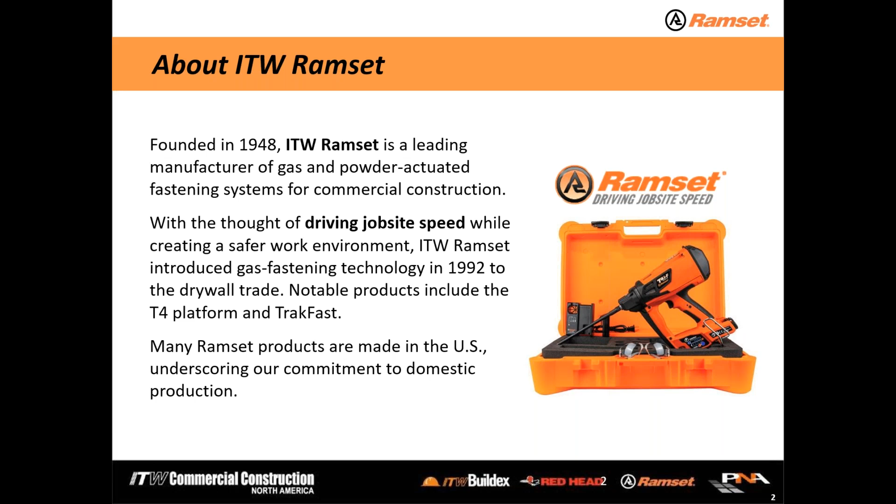Last paragraph there, a lot of our products here are made in the US, and we'll show you on the next slide here some of that. So we've got a little map. On the Ramset fasteners, most of everything is made in our Paris, Kentucky facility. Those familiar with the Kentucky area, Paris is close to the Lexington area. So majority of our fasteners are made there using USA steel, so we can qualify for some of the BABA type government jobs that might be out there.

Please see us if you have some of that. Our corporate office and where the ITW Commercial Construction Company is located is in the Glenview, Illinois area, just outside the Chicago area. We make some tools in Libertyville, and then in Roselle and Itasca there's some manufacturing facilities for some of the other brands that commercial construction has, Buildex and Redhead. So a lot of your blue screw Tapcons are made here in the US. Some of the Buildex Teks screws, again, are made here in the US. So we're a USA manufacturer, we try to do what we can to bring you products made here.

So if you have projects that need that, again, please come and see us there. Our parent company is Illinois Tool Works. That's a Fortune 200 company, and they provide us with a lot of financial backing to do a lot of different things. So go to the next slide, please.

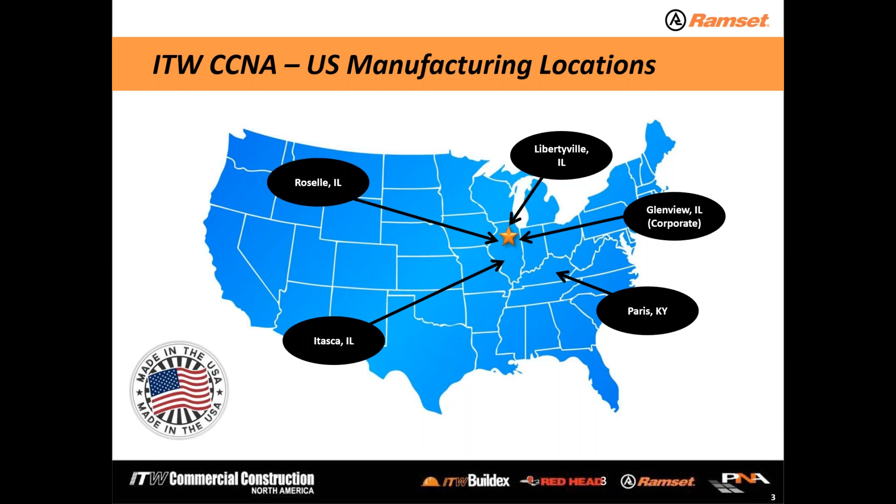So now we kind of get into it a little bit. How does this forced entry thing work? When we shoot fasteners into concrete, for example, these fasteners kind of create their own hole. You shoot the fastener in, you get a lot of pressure and heat created. That concrete is kind of pushed away and provides kind of a friction or compression hold. And then you do get some heat from that driving application localized around the point, and from that heat, you get kind of a sintering or a bonding. You can kind of see that in the photo there. So it provides a very, very good, strong hold.

And then these fasteners are a little bit more than a common 1008, 1020 type nail. These are high carbon steel, they're heat treated, and they have to be in order to penetrate and create their own hole, break up some aggregate that might be in the concrete, and give you that bond shown in the photo there.

Couple important things here: edge distance. When we talk about shooting fasteners into concrete, with concrete being fairly brittle, you need to stay away from the edge about 3 inches. You'll find there's kind of a rule of 3 going on here. With all that pressure of the fastener making its own hole and going in, if you are much closer than about 3 inches, the concrete kind of gives away and the edge might break away from the concrete, ruining some aesthetics that might be needed on the particular project. So it's important to stay at least 3 inches away from the edge.

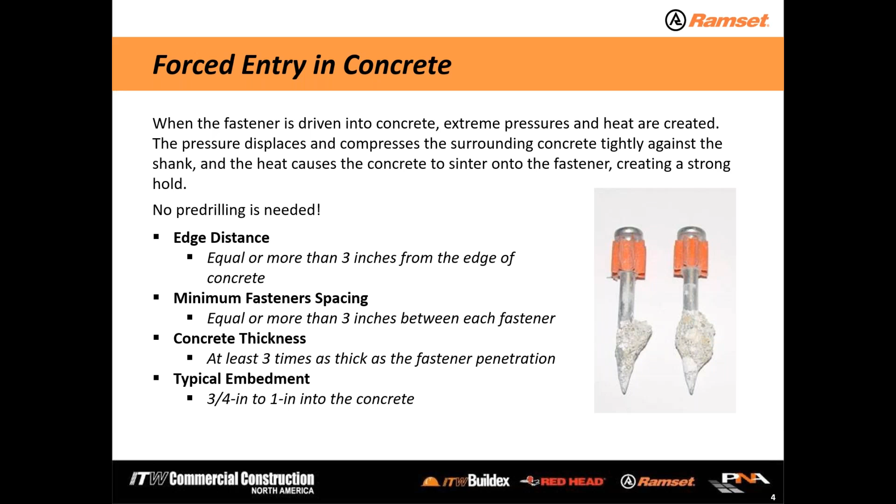Now, going into steel. Steel is a little bit different of a base material. Basically, when we drive a pin into steel, the steel around the shank is displaced. We're creating a hole, so we're not drilling—the nail itself is creating the hole. When the fastener goes in, the steel, being somewhat elastic, will move away from the shank, and then with it being elastic, that displaced steel wants to take back its own space, so it's going to flow back around the shank.

And if you've got any knurling on the fastener itself, that is a very good thing with steel fastening—it provides increased surface area. So all that steel is going to flow in and out of that knurled area and give you increased bond. There is some heat—I wouldn't go so far as to say it welds itself in, but that heat does help that fastener out quite a bit going in.

So edge distance and spacing is a little different than concrete here. This is something we want to take a look at. You want to stay about 1/2 inch away from the edge, and the edge is any physical edge to the center line of the pin. The 1/2 inch edge, really, if you think about a powder actuated tool or a gas tool, that's about the diameter of the fastener guide or the muzzle that the pin exits from. So we want to be sure that edge of the tool is completely on the work surface so as not to cause the pin to exit free flight or something like that.

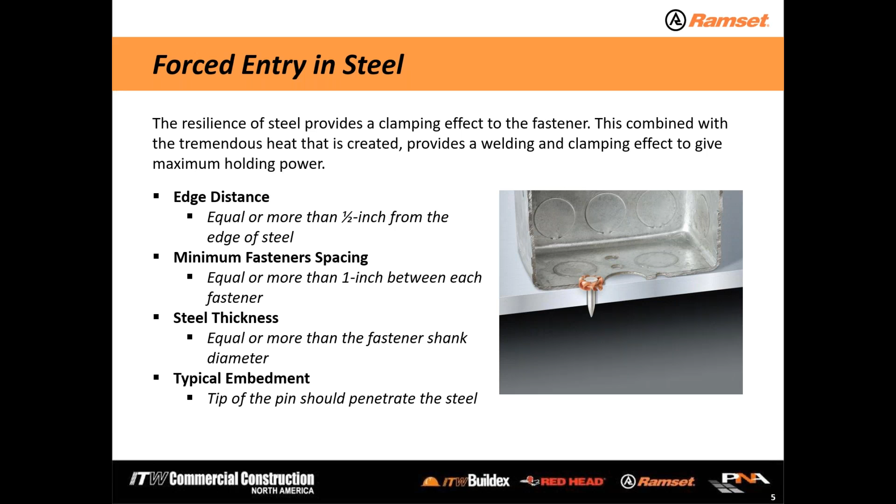So why do we use forced entry? The number one reason would be speed. Basically, as fast as I can pull the trigger, I get a fastener to come out of the tool. I don't need to drill, I don't need to find the right drill bit for the anchor I'm using, I don't need to manage the dust, I don't need to find cords and hoses to go along. A lot of that relates to that cost-effective square you see on the screen there, because I don't have to worry about cords, hoses, dust, and drill bits. Again, as fast as I pull the trigger, I can get a fastener to come out.

I can handle light to medium duty applications — interior partition walls, maybe exterior curtain walls, not necessarily structural stuff, but curtain wall type applications, MEP, conduit straps. There are a lot of different applications we'll talk through later in the presentation. And then these tools are completely portable. They're probably the first portable, cordless type tools in the marketplace. Again, I don't need cords and hoses to drag along to drill holes or mitigate dust with vacuums and such. So it's a completely portable system.

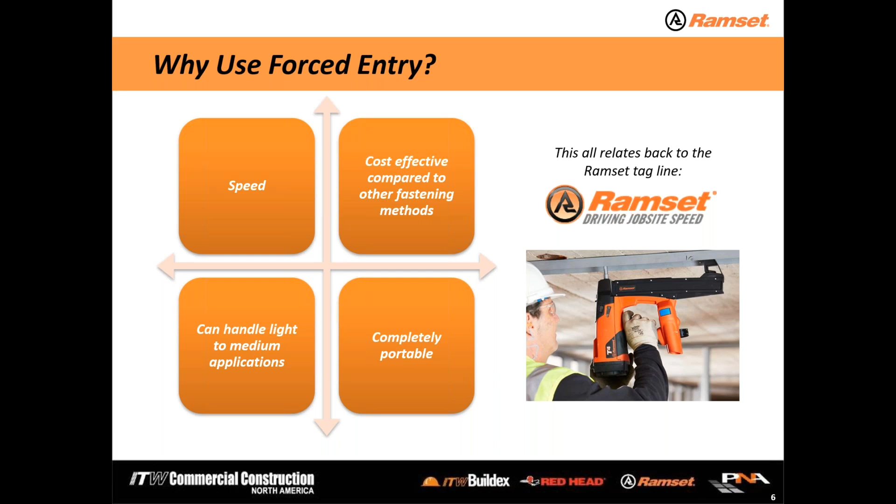Why we use gas versus powder. These are the two basic systems that the Ramset brand offers. With gas, you need speed — as fast as I can push down, pull the trigger, and let off, I get a pin to come out. Most of our gas tools have at least a 40 pin capacity, so I can do that 40 times. With a powder magazine, I can do that up to 10 times. The big advantage for gas is in bullet point number three: low recoil. It's very, very easy to use, easy on the operator, not a lot of fatigue when using a gas tool.

However, the downside is I'm limited on power. Gas tools, battery tools, and similar tools in the marketplace today are all about a number 2 brown load as far as power goes, in comparison to a powder actuated tool. If you know a little bit about powder, number 2 is low on the spectrum. I've got a number 3 green load with more power, a number 4 yellow, a number 5 red, and a number 6 purple I can go to. So that's the advantage of powder — I have the power for very deep embedments, the power for larger shank diameter fasteners, and the power to shoot into heavy, thick steel. There are a lot of different reasons to need that on a particular job site.

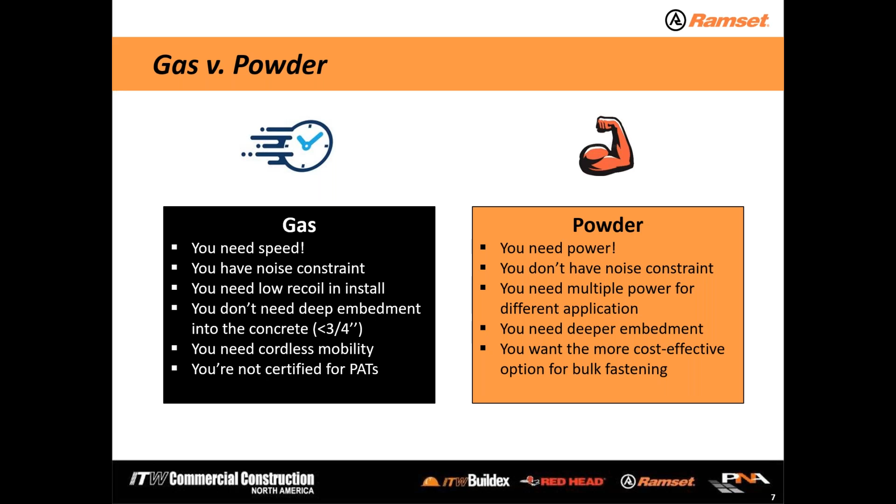We can try our step shank pins. The step shank pin is a unique pin or nail geometry where the tip of the pin has a smaller shank diameter than the back side of the pin nearest the head. The theory is that smaller shank diameter almost gives you a pilot hole for that larger diameter to follow, and that does tend to increase stick rate and help us get into difficult base materials.

Masonry, or basically CMU block, is going to be your next most common type of base material. Masonry you see a lot around stairwells and maybe elevator shafts. Could be the entire building is built with that.

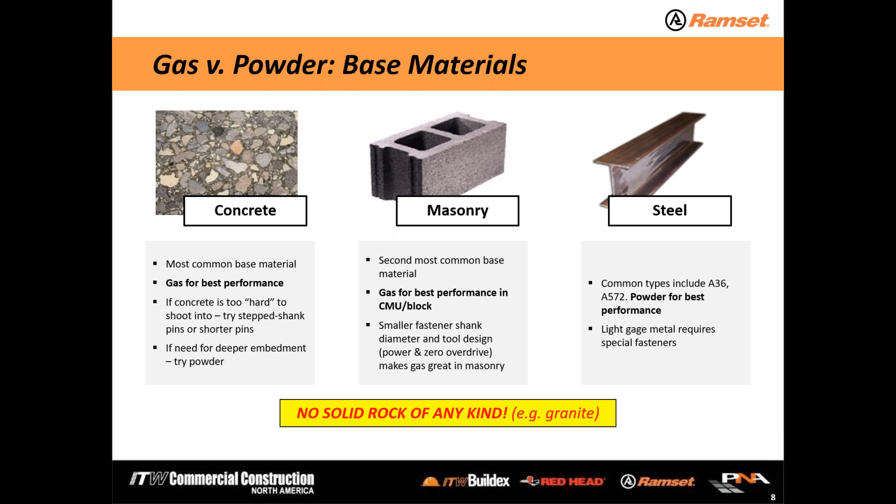Here what we've got is one of the more common applications that a lot of you may recognize: interior track down to concrete and or steel. For this application, we use and like to promote our T4 mag tool. Again, it's a gas tool. We sell fasteners in packs of 1,000. You get 2 fuel cells, you get 1,000 fasteners, and that's usually enough to drive everything. The tool also does have a lithium ion type battery.

This tool is unique in that it has a battery and fuel gauge in the back of the tool. There's a little round button at the back that you can push to see the level of the battery and or gas that might be in the tool. So you'll never run out - you pay attention to that, and it's a good, neat feature to have.

T4 mag is a pretty powerful tool, one of the more powerful tools of its kind in the marketplace. A couple different advantages: it's got a nice tapered front housing, gives you a good line of sight for the operator when they're working overhead. That's important where you want to know the placement of where the fastener might be. Low pushdown force - it's a very easy tool to compress. We only compress the front end about 3/4 of an inch, pull the trigger, low recoil. It just is a nice tool for the operator to use on a daily basis.

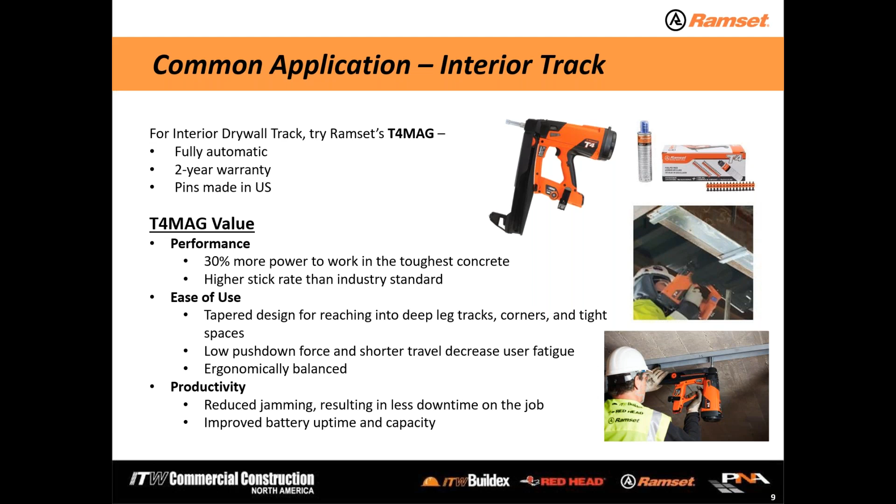The RA27 is a very comfortable tool to use. The automatic spring return and the push down force make it a very smooth type tool. I think it operates a little nicer than a lot of tools in the marketplace. It does have an optional magazine on the front that lets you shoot 10 fasteners, corresponding with the strip load of 10.

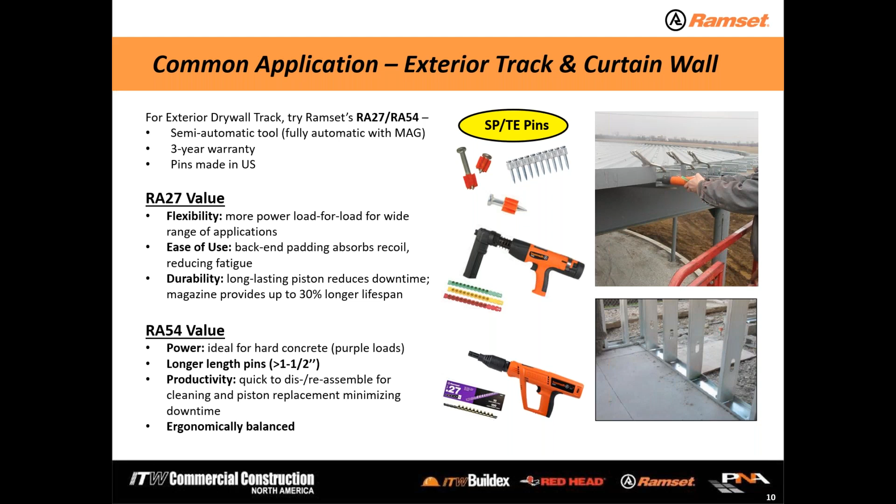Next application, please. Next slide, please.

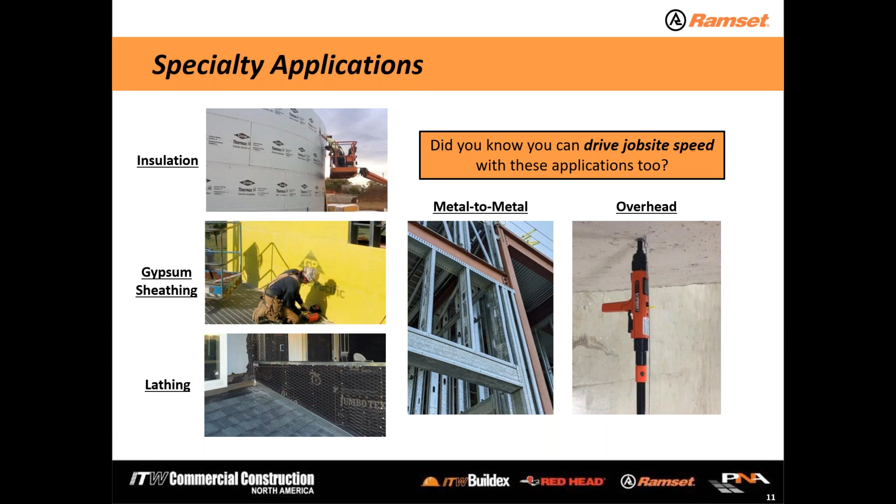Here we've got specialty applications. These are some of the things that maybe you weren't aware you could shoot. Some of the more uncommon things: insulation, gypsum sheathing, lathing for stucco or something like that, metal to metal, and overhead. Next slide.

Going into it, we've got the GypFast tool. This tool is designed to shoot either gypsum sheathing or plywood up to light gauge metal studs. It's a gas tool with a coil magazine that has a coil of 150 nails. And the nails have a unique barb to them.

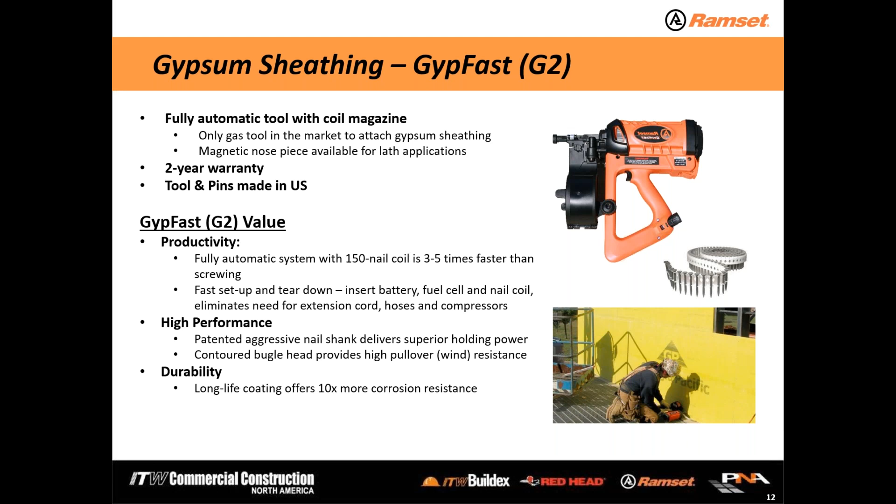So if we go to the next slide, we'll talk a little bit more about that. Best practices for the G2 tool.

You can see there in the top, the coil kind of floats in the magazine. The nail itself has a very aggressive barbed knurl to it. What tends to happen is as you shoot the light gauge material, the metal petals on the backside, and then that barb kind of interlocks with that petaled metal, which gives you that pull-out resistance in those light gauge applications.

The sweet spot here really is going to be 18 gauge, 16 gauge, and 14 gauge. It can work in 20 gauge and it can work in 12 gauge. There may be some slight issues you may have to overcome in either the light material or the heavy material, but primarily we'd like to keep it to 18, 16, and 14 gauge if possible.

With the gypsum sheathing, it's important that we don't break the sheathing paper. So in order to do that, we've got a depth drive adjustment. You can see that in the lower right-hand side photo, there's a little thumb wheel adjuster. So when you first walk on the job site, it does take an operator with a little bit of attention to detail to set up the tool.

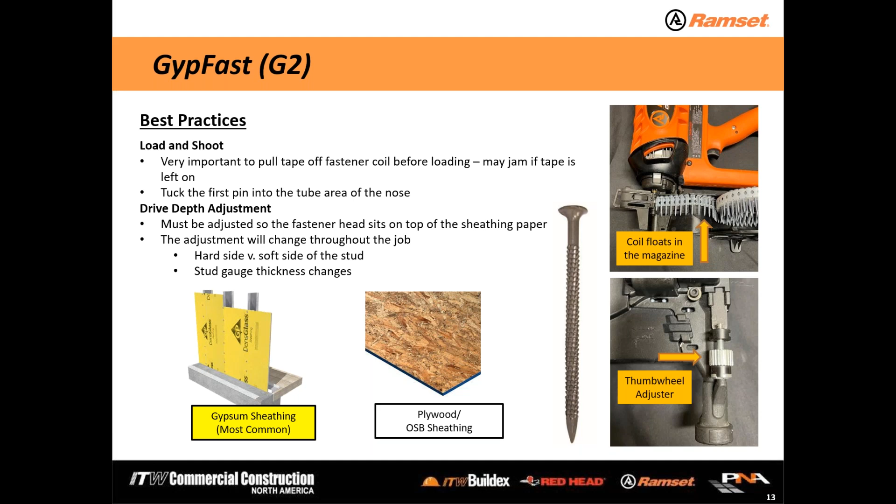Lathing. So a lot of different places in the country, Arizona, Florida, they're going to put lathing over maybe a CMU block type building or whatever, whether it be to remodel or to put stucco up. Sometimes in different buildings, we'll see them use lath around metal columns for fireproofing.

So our gas tools can be used in these applications. You've got the GypFast there with the coil nailer. You've got the T4 mag tool and the TF 1200 tool. There's an optional magnetic nose piece that would need to be added to each one of these tools to do the lath application. But basically, you would load the magazine as normal with your pin of choice.

The normal nails of a gas tool, the head diameter is only about 1/4 inch, and for powder it's about 5/16. So this lathing disc is about 1 inch in diameter and gives you some decent holding power with that lathing system. Okay, next slide.

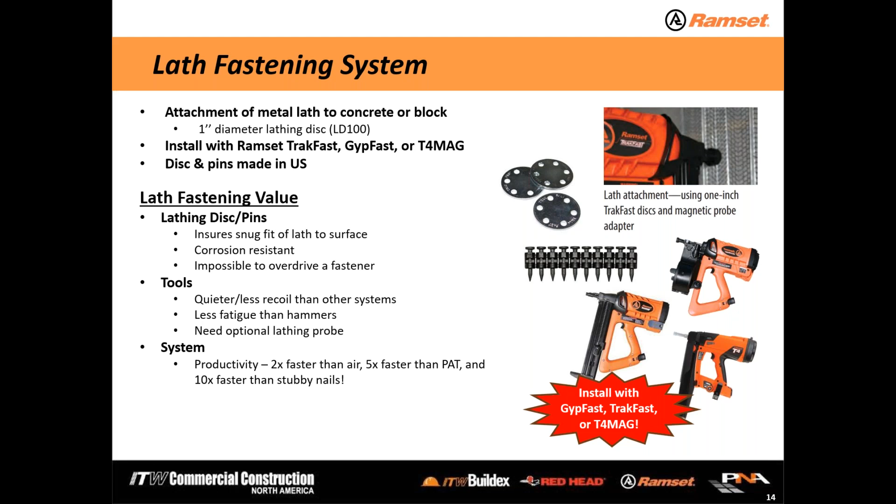Okay, another application here is insulation. As different building owners try to improve the efficiency of the building, they want to use more and more insulation added to the interior and exterior of the building. So we came up with this insulation tool, probably goes back to, I don't know, maybe around 2010-ish when we kind of came out with this.

The pins here are made in Canada. And I should say the fastener is made in Canada, whereas the pin that goes in the fastener is made in the US. We'll have another better look at the cutaway view of the fastener, but here we've got a kind of unique looking tool with a long nose to it. And the reason for the long nose is to go into different thicknesses of insulation.

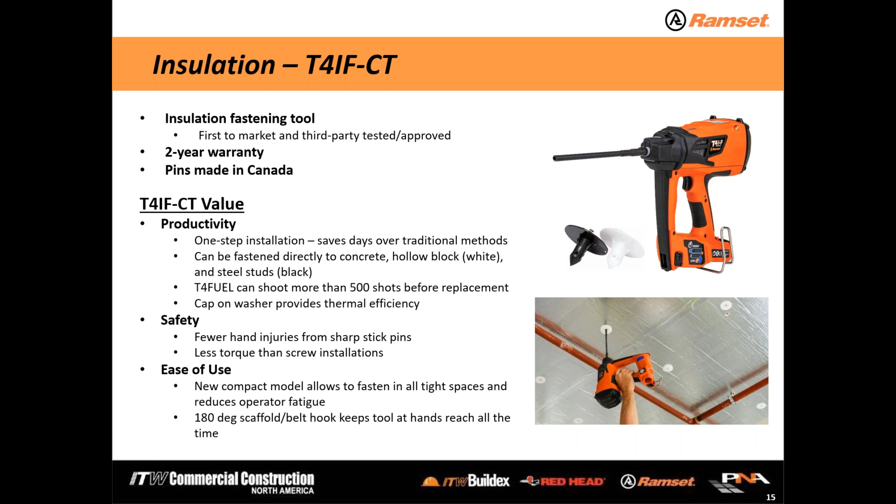Basically the black work contact element, or the nose piece, goes into the bottom of that, the stem of that fastener, and drives the fastener in place. You pull that out, and then there's a cap that goes over the hole there. That cap is built into the fastener itself, it snaps into place and makes the entire fastening thermally efficient. The building owner loves that. The architects and engineers love that. Basically you're not exposing that metal fastener at the bottom to any of the weather. It completely seals that particular cavity off, giving you thermal efficiency.

The black fastener there is very similar to the white fastener. We colored it different to work in basically steel studs or wood. The difference there would be the pin inside of the fastener itself. We've got one of those helical knurled type fasteners in the bottom there, and that will work in steel studs. Again, your sweet spot is going to be 18, 16, and 14 gauge type material. The same black cap is in there. Because the system can do concrete, block, steel stud, or wood, it's very, very flexible for most any applications. We're one of the few people in the marketplace that has the ability to do all of those particular applications.

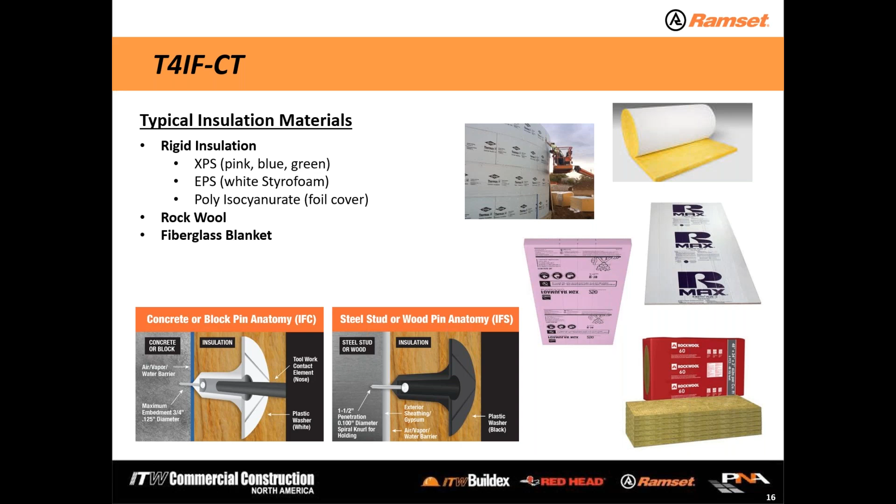Overhead applications would be somewhat of a common application for the acoustical contractor. Those of you in AWCI that do a lot of acoustical stuff will probably know the Viper tool. It's a very unique tool in that it's an overhead-only tool, catered more toward the overhead contractor. So we've got a small, very lightweight balance type tool that is used overhead, comes with some different extensions. It is a powder actuated tool. We can do power levels 3 through 5, so green, yellow, and red.

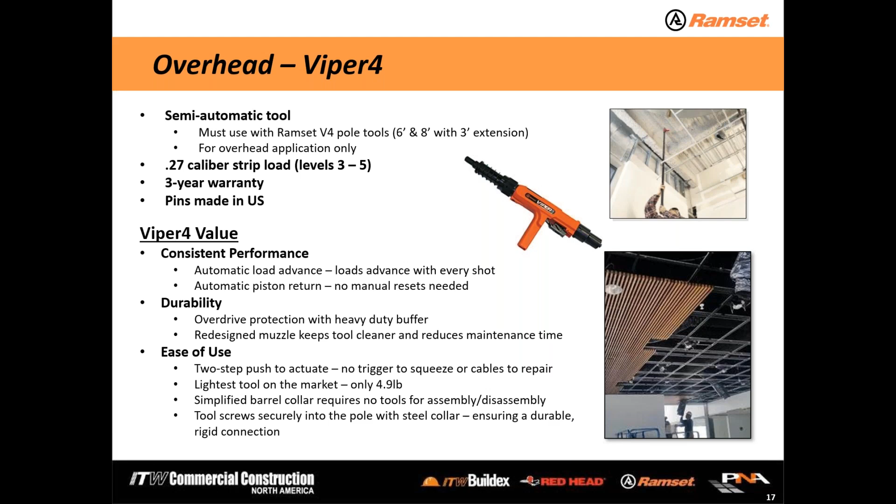Next slide, please. So a couple best practices for the Viper 4 tool.

So the tool is a little sensitive in the way it likes to be operated. It's designed to be a push-push type tool, where you place the tool up against the ceiling in the location you want. You compress the front end of the tool. It's a spring-loaded front end.

And then the trigger for the tool is built into the pole itself. So there's a sleeve on the bottom of the pole tool that you would slide up, and then the tool will actuate or fire. A lot of times operators will try to do that all in one motion, essentially trying to stab the ceiling. If you try to do that, you do tend to get a little bit more misfires. You'll get maybe one or a couple that'll go off in a strip and a couple that won't. So if you're purposeful in the motion and use that push-push, it will go off each and every time.

With the trigger being built into the sleeve, it's a very, very safe tool. It's a lot different than maybe if you've looked at or used Viper tools in the past. This was redesigned probably a little bit more than 10 years ago, but some people may not know that that trigger is now built into the sleeve of the tool here.

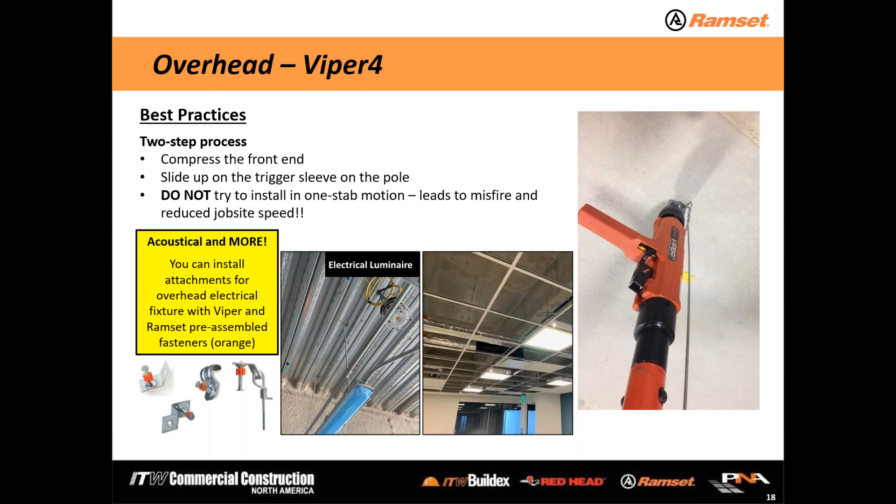Another specialty fastener we have here, we call it the TEK034 pin, or the TEK pin. This is used in metal to metal applications, where you might be assembling a lot of repetitive things like box headers or jamb studs to a specific design requirement on the drawing. You can assemble those off to the side, bring them up, and then put them together with screws, or you can use the TEK034 fastener if that works in the application.

So it's a unique 3/4 inch long fastener. It's got a unique helical knurl to it. Works very, very well again in that 16, 14, 18 gauge steel.

So the collation there is a unique breakaway type collation. If you've ever used a gas tool maybe to install track before, perhaps you've seen a little plastic donut trapped underneath the head of the fastener. With this breakaway collation, you don't have that. It's designed to be brittle, and then when the head of the fastener exits the tool and goes up against that material you're fastening, that collation, rather than being trapped under there like a donut, is brittle and will break away. So it gives a nice, clean, flush finish.

So if you're applying something over the top of it, like drywall or maybe a building paper or something like that, it works very, very well in those particular applications. So this is a relatively new fastener for us. It's only been out for a couple years. It's shot out of the TrakFast TF1200 tool.

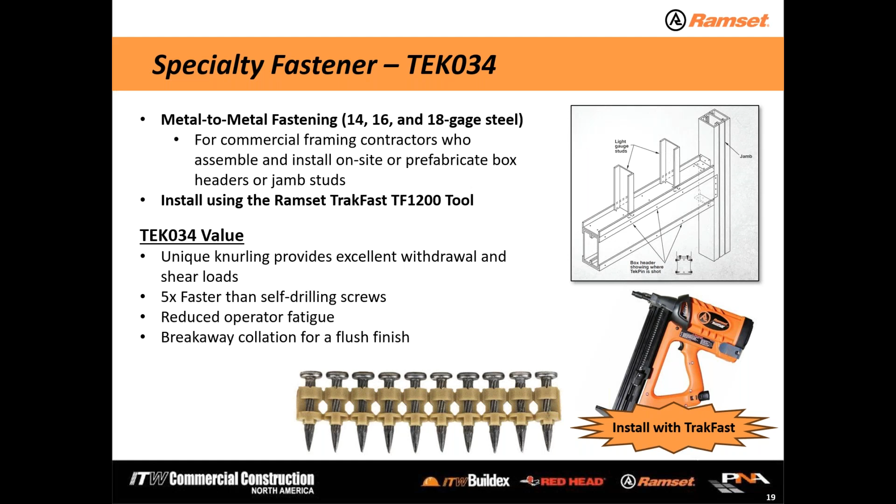Another special fastener here, again shot with the TF1200 TrakFast tool, is for the attachment of plywood to light gauge metal studs. Basically, we took that TEK034 fastener and made it longer. So you can shoot 3/4, 5/8 plywood to metal stud without much of a problem. Again, your sweet spot here is 14, 16, and 18 gauge steel.

Load up the TrakFast tool, takes about 40 pins, and you can do this much, much quicker than screwing. If you've got special requirements for fastener spacing due to wind loads, you can put these fasteners as close to 2 inches apart. And there's data to support the application in that. So it works very, very well and much better than traditional screws, and essentially drives job site speed here.

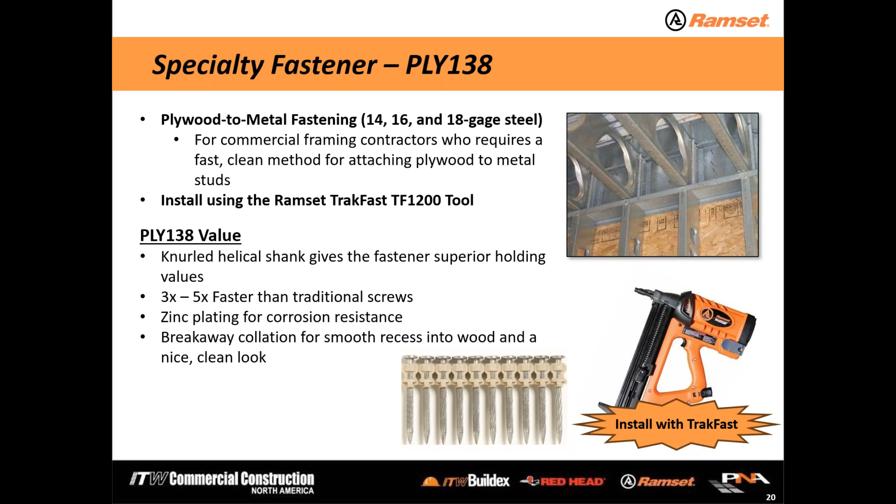Here to kind of recap, it's a good slide that shows the gas and the powder platform that we offer at Ramset, all the various tools, and some of the trades and applications we gear each tool toward. So if there's something on there that might meet your needs, please contact us.

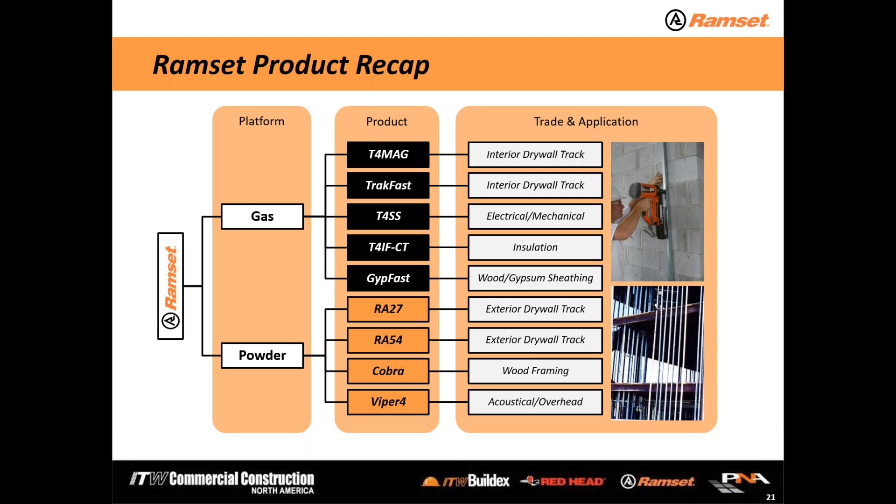So as we kind of wrap it up here, we're here to help you out. Hopefully maybe there was something here that sparked your interest. There's a lot of information at ramset.com, a lot of different fastener and tool sell sheets and brochures that you can download. Different performance data. If you're interested in that TEK034 pin or the PLY pin, there's data to support all of that.